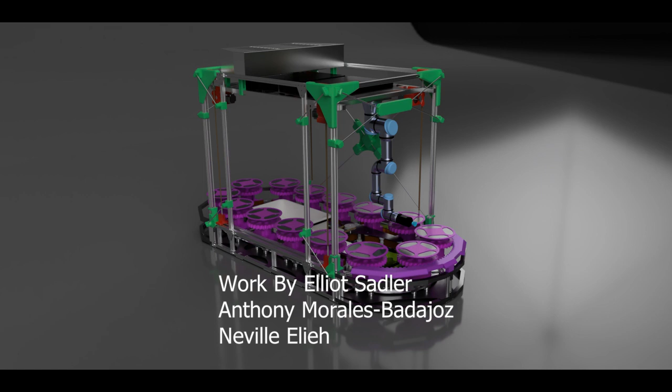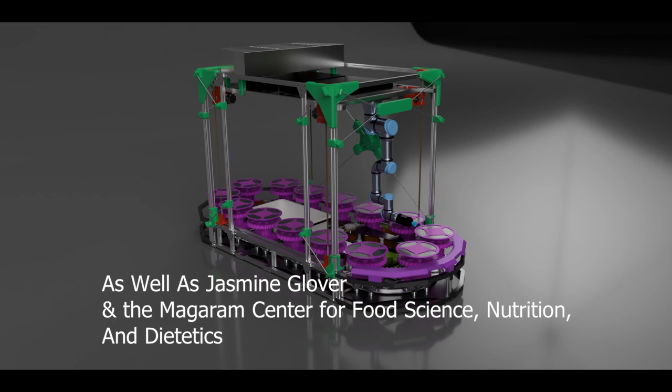Let's now begin with a system overview. We'll take a look at each individual system of the enclosure. Here is our overall enclosure and self-monitoring environment.

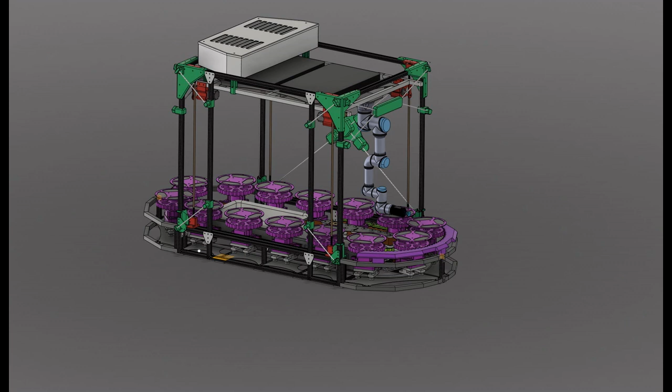First, we have the electrical system, which contains the control unit and the electronic components of the enclosure. Next, we have the RGB plant lights and harvest collection bin.

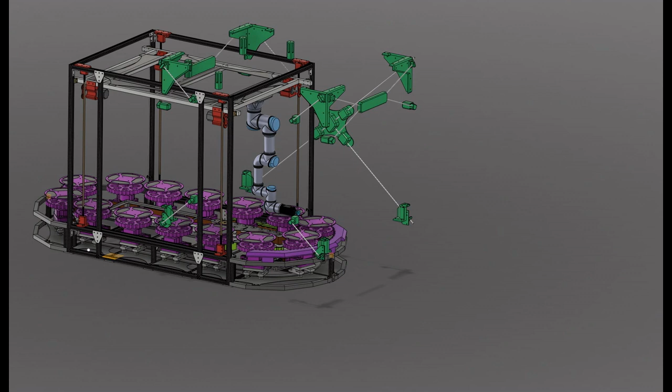Following this is the enclosure support system, which provides stability as the robot arm is in motion and prevents torque. Here are the NEMA 32 motors that have a 40:1 gear ratio and are positioned on tension belts, which allow for the raising and lowering of the gantry system.

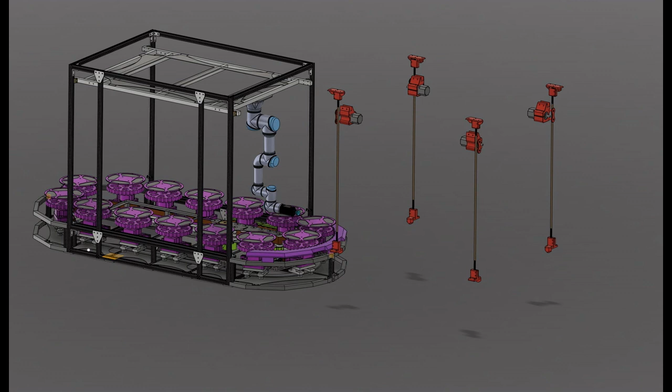Following this is our gantry and robotic arm in one step. The gantry is responsible for the placement of both grow lights and arm, in addition to allowing for the grow lights to be placed at optimal distances from the plants that can be adjusted at different growth cycles accommodating for plant height.

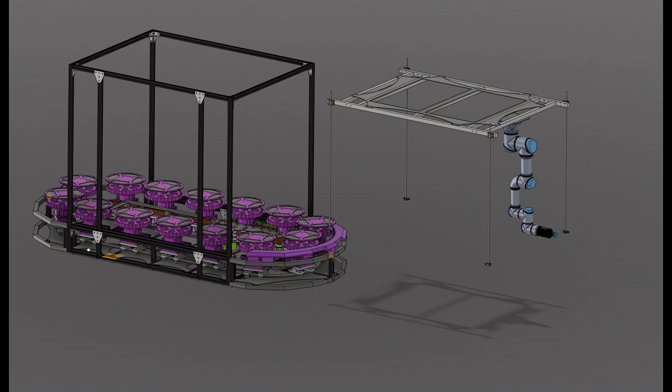Then we have a universal robots cobot, specifically the UR3E model, which is safe to use, simple to program, can operate within distance of people, and features a suction end effector for picking and placing of the harvest. This feature is self-contained and does not require the use of an additional pneumatic system.

Now we will take a closer look at the carriage system. Here we've provided a closer look at the carriage's internal components and assembly in an exploded view. The top and bottom are completely separate components that are only connected by a thrust bearing that supports the weight of the plants and carriage components.

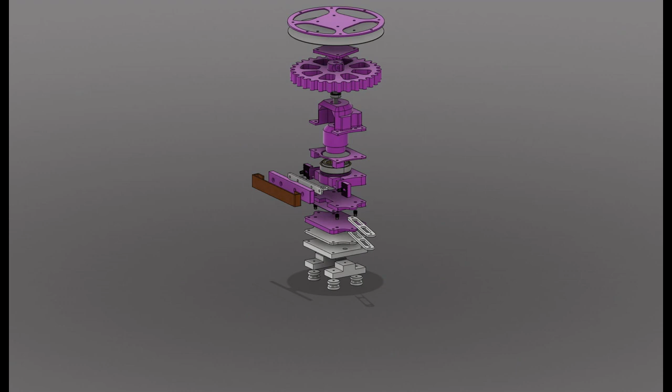All of the components are designed with the intention of utilizing 3D printing technology, the flexibility of an adjustable system, and in addition allows for the upper half of the carriage to spin a total of 360 degrees.

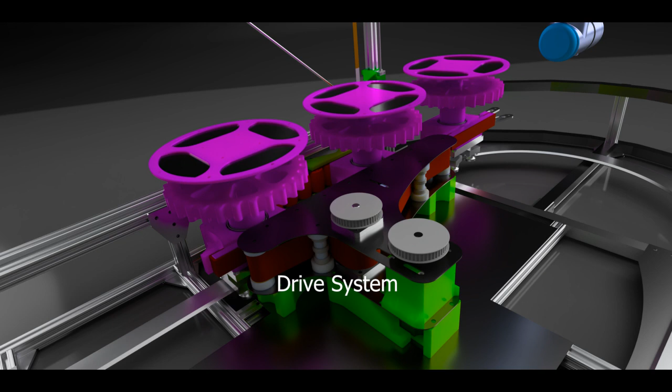The drive system uses a friction-based belt system to power 14 carriages that travel around an oval rail. The thrust bearing, the wave gear, and the mounting plate are visible beneath the carriage assembly.

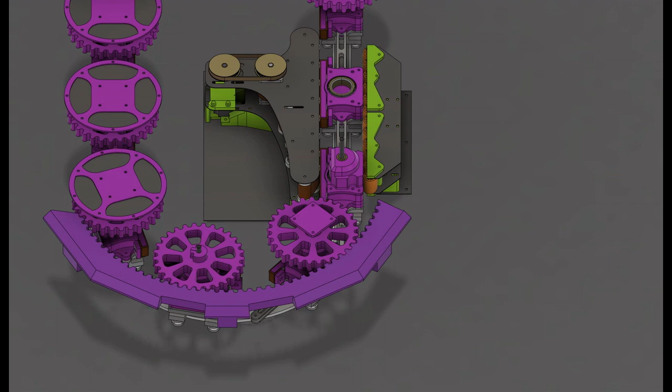Each individual car's engagement to the friction belt may be adjusted, and the counterforce pieces visible here can slide in and out to adjust the cart's alignment as they tend to go in and out of path during travel. As the train is pushed through the drive system, the wave gear above engages with the outer wave gear and rotates each plant 360 degrees through the scanning area.

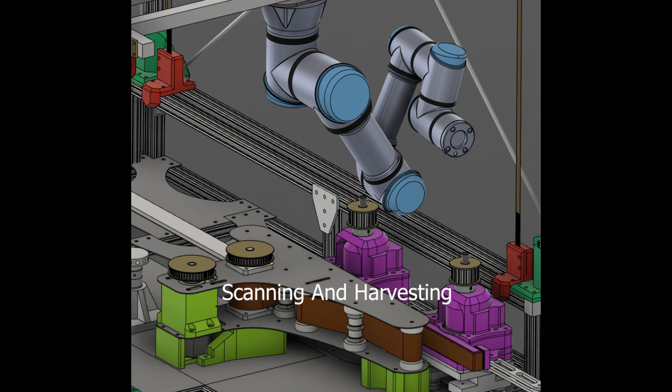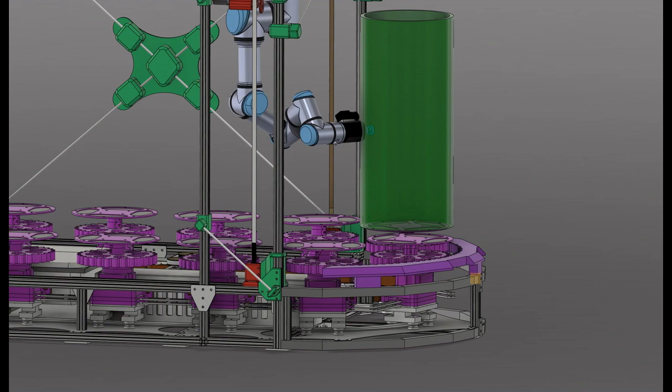Using hyperspectral imaging in 900 to 1100 nanometer wavelength ranges, each plant moves through the scanning area in which the cobot will then scan every plant to monitor current health.

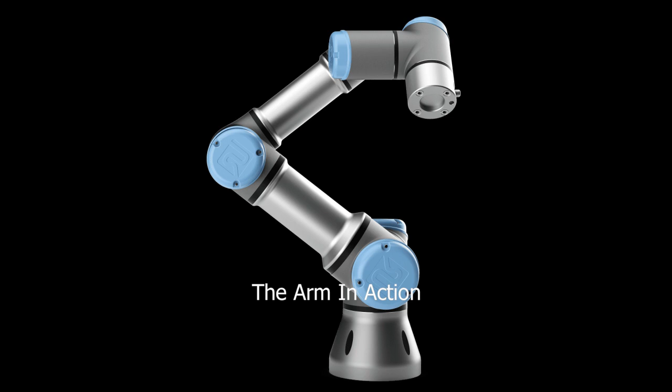Now is presented the arm in action. In this clip can be seen the arm using the suction end effector to pick the tomato and next place into a container.

In this clip, here we can showcase the ability of the cobot to maneuver to different positions needed for harvesting or monitoring.

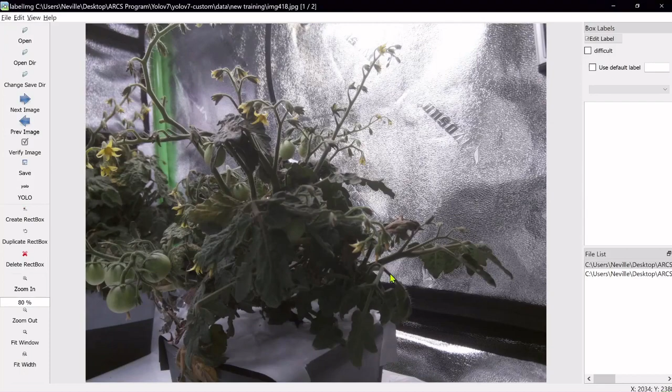Next, we will have Neville Elich to discuss the overview of the AI system. Hello, my name is Neville Elich, and today I'll be demonstrating the object detection process.

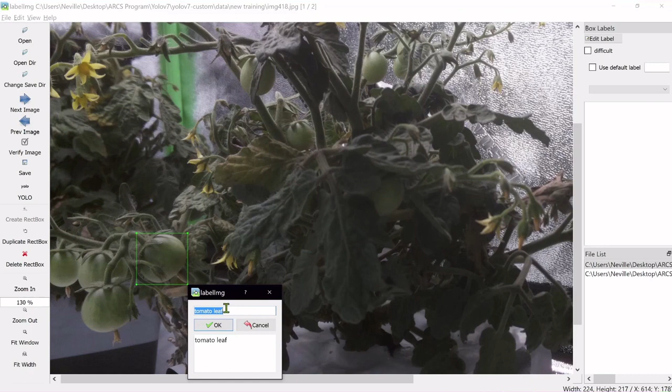To begin your labeling, you would first select the image that you wish to train your model with. So we're going to be using this one. Press W and you select the area in which you want to make a label for, and for this one, we're going to name it tomato. You'll do this across the whole picture until you get something like this. So as you can see here, now we have all the tomatoes labeled.

So now we can choose if we want to move forward to the next picture, or maybe we want to label all the leaves, anything our model needs.

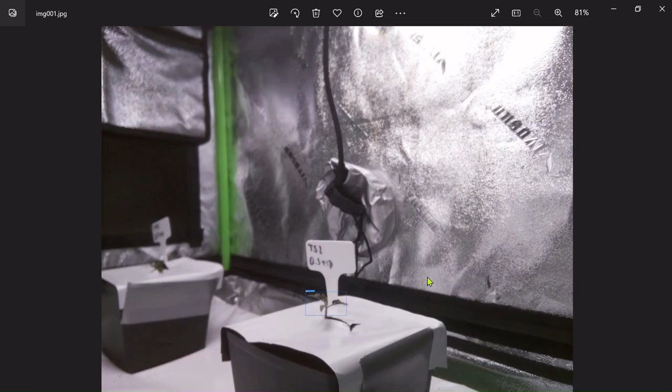Now to show you guys what type of results we can expect from our model. So here we have a few photos that we ran our object detection on. As you can tell, our object detection was able to identify this tomato plant and name it as a sprout, as it doesn't have its significant tomato features yet. It will continue to label it as a sprout until significant tomato-like features are shown.

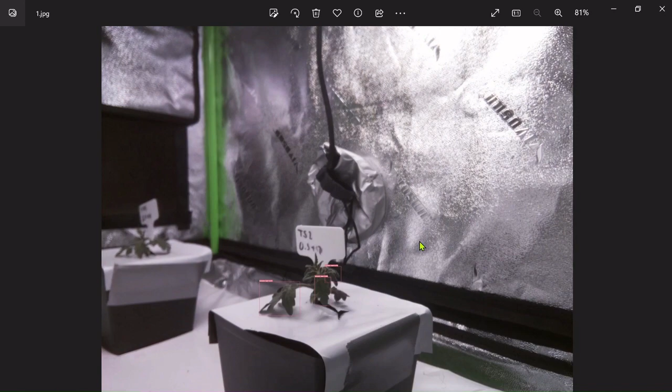As the tomato plant grows, it eventually will identify when it has the features of a tomato leaf, and it will begin to label the leaves as tomato leaves. As you could see, it's clearly labeling which tomato leaves are clear and identifiable, and will continue to label the ones that can provide us more information.

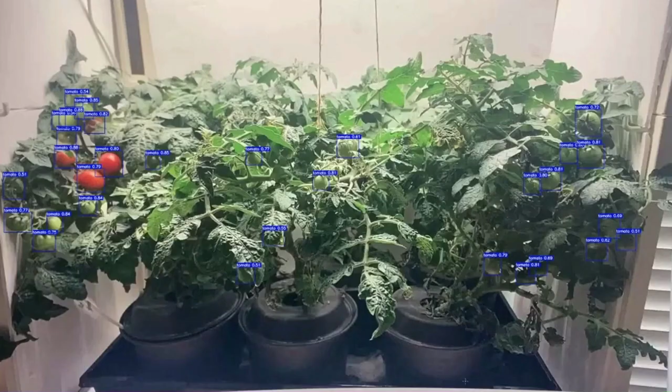Last but not least, here's a video of live detection on our tomato plant, where it identifies all the tomatoes.